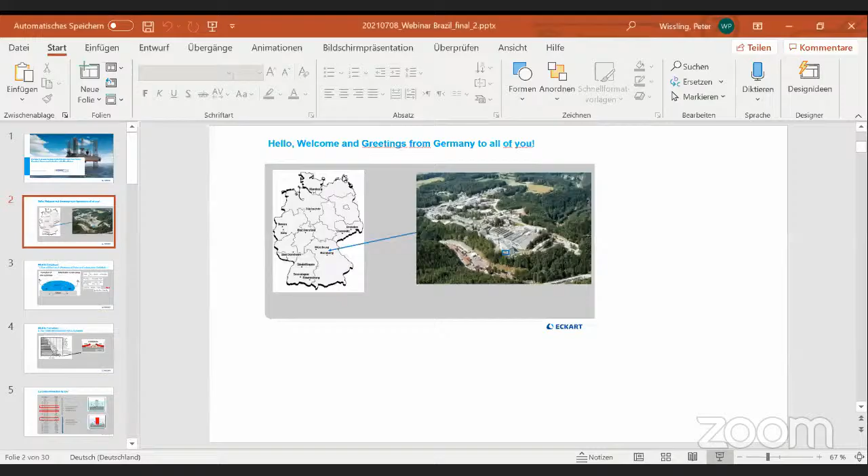So please indicate to me, is the screen visible now? It's visible, Peter, go ahead. Thank you very much. So once again, I am excited always what is technically possible. I am talking to you from the southern part of Germany, nearby the city Nuremberg, which you might know. You see a picture of our plant, the Eckart plant in Germany, and a blue window marked, and that is the window out of which I talk to you today. I would have preferred to talk to you face to face. That is unfortunately not possible.

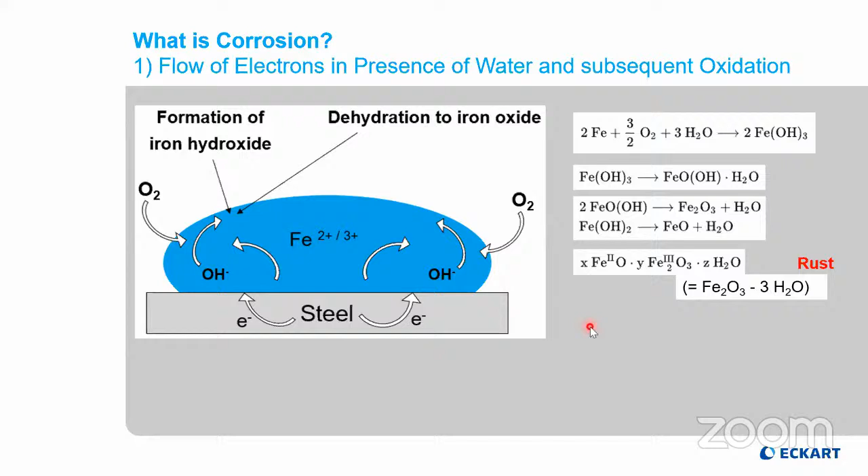The steel in that corrosion process is oxidized, disappears away, the paint is removed, and this rusting process is a big harm to the whole industry. How can this process be avoided?

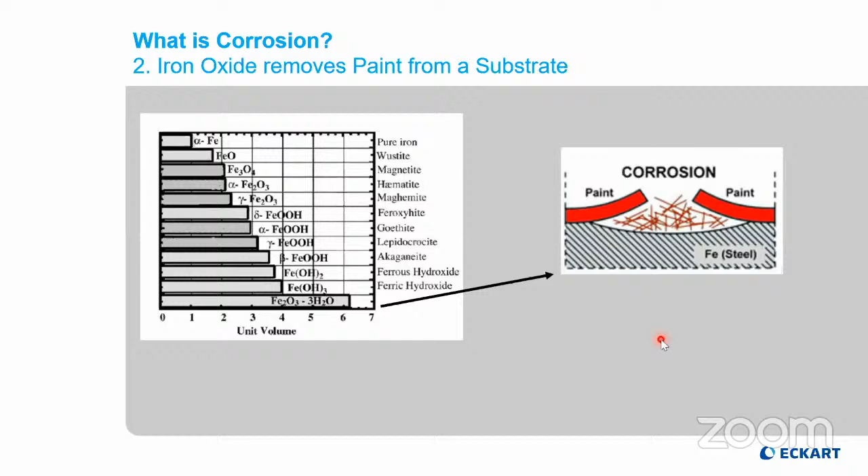Well, by introduction of a metal, zinc, that is electrochemically more negative than iron. This particular metal is then oxidized instead of the iron, and the steel substrate is kept in place. The particular metal, as mentioned, is zinc. Zinc is available in large volumes, it is fairly cheap, and therefore perfectly suitable to be used as a corrosion protective pigment.

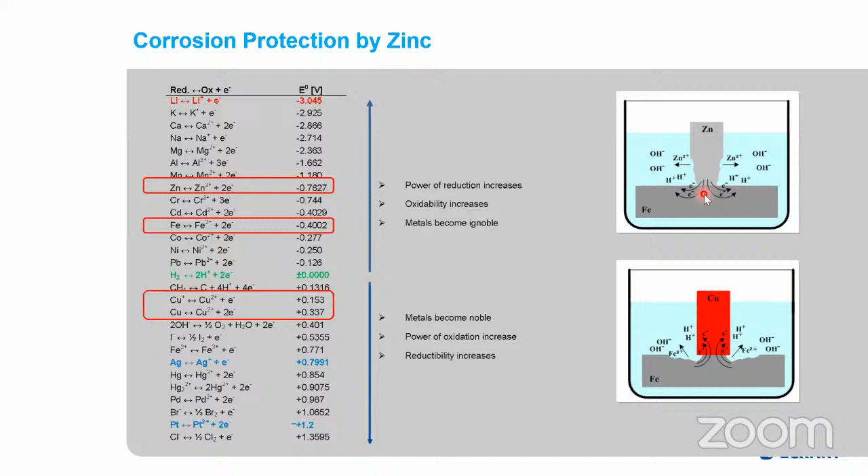If instead of zinc we would use a metal that is more noble in the electrochemical series, for example copper, the adverse effect would occur. The copper would remain in place and the iron would oxidize away. As we don't want this to occur, today we will talk about zinc as a corrosion protective pigment.

Steel needs to be protected when used, for example, for small items like screws, fasteners, or brakes. These are typically used in the automotive industry and are coated in a so-called dip spin process.

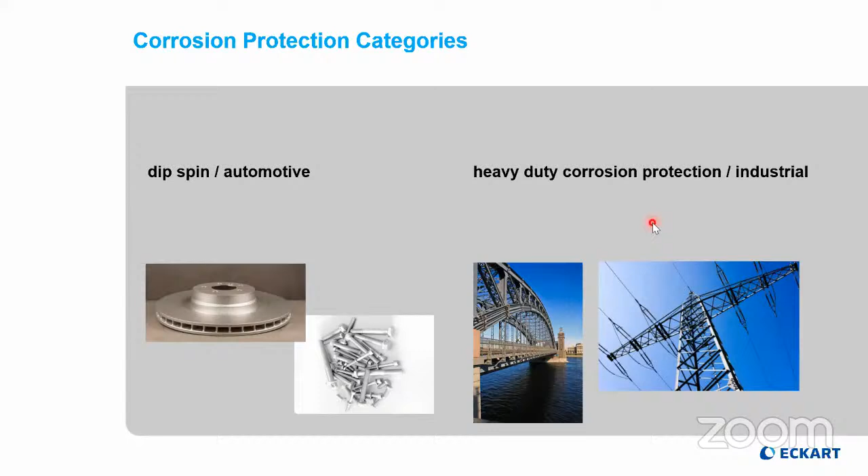Our topic for today is heavy-duty corrosion protection, protecting bridges, power poles, lamp posts, railway items, and so forth with corrosion protective paints. You are all very familiar with heavy-duty corrosion protection. This is predominantly solvent-borne epoxy, typically chemistry. It typically uses zinc-rich primers with a minimum of 85% zinc in the formulation.

It is also a price-sensitive market, but nevertheless, we want to penetrate this market with our ZincFLAKE products. Our zinc flake products are called Proflake. Proflake is an abbreviation standing for protective flakes.

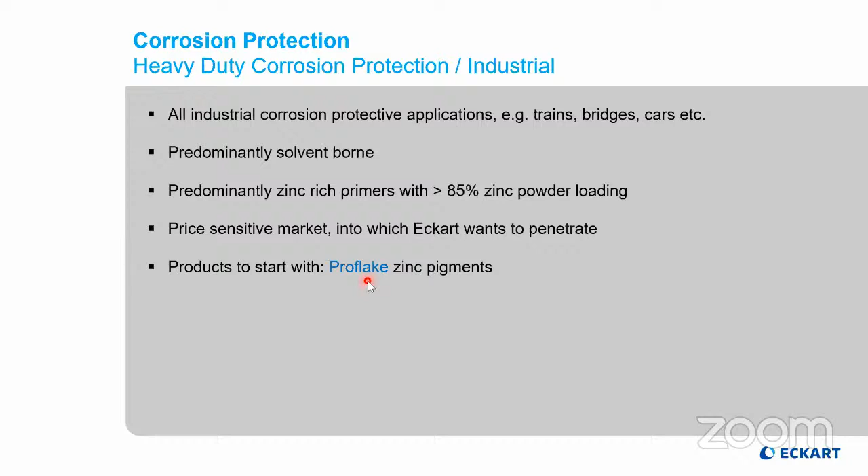So instead of what you are used to in standard zinc-rich primers, where zinc dust is used, which is a spherical species with a relatively low surface area, a very small average particle size of around 3 microns, and a small oil absorption value, our offering is ProFlake, a flake-shaped zinc particle with a substantially higher oil absorption value, meaning a substantially higher specific surface and higher binder uptake. This is very important to understand because, as I will explain, it later influences the formulation of zinc flakes in corrosion protective systems.

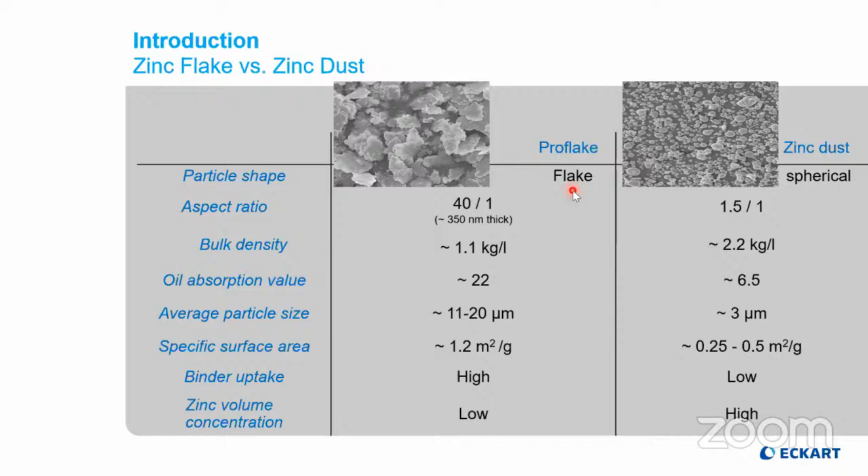We produce our zinc flakes in a two-step production process. Step one is a melting process where zinc at around 420 degrees is molten, and the liquid zinc is pressured through a nozzle into the air. This process is called atomization, and the result is granular, more or less spherical particles.

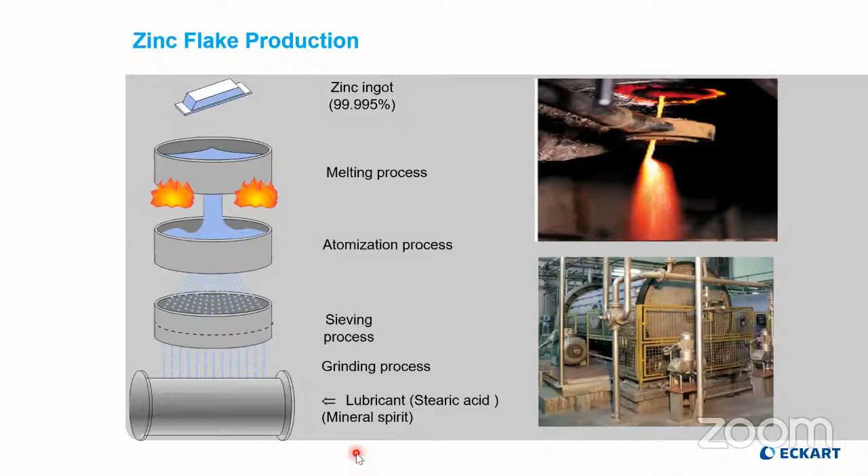In the second step, we mill them, grinding them in a ball mill into the described flat zinc flake particles. This is done using a lubricant, stearic acid, in order to avoid cold welding during the milling process. The milling is predominantly done in a dry milling process, but it can also be done in mineral spirit. Both options are possible and are performed in our factory.

The current ProFlake zinc flake portfolio is relatively limited, but sufficient to fulfill all requirements. We have two zinc flake products in powder form of two different average particle sizes: a finer one, 14 microns, ProFlake 1400, and a coarser one, 20 microns, which is the standard pigment where we initially start to work with.

If, however, you feel inconvenient working with powder, maybe because of safety concerns or dust creation, you can easily use a zinc flake in paste form instead, whereby we offer a 90% pigment, 10% mineral spirit flake paste form of this ProFlake.

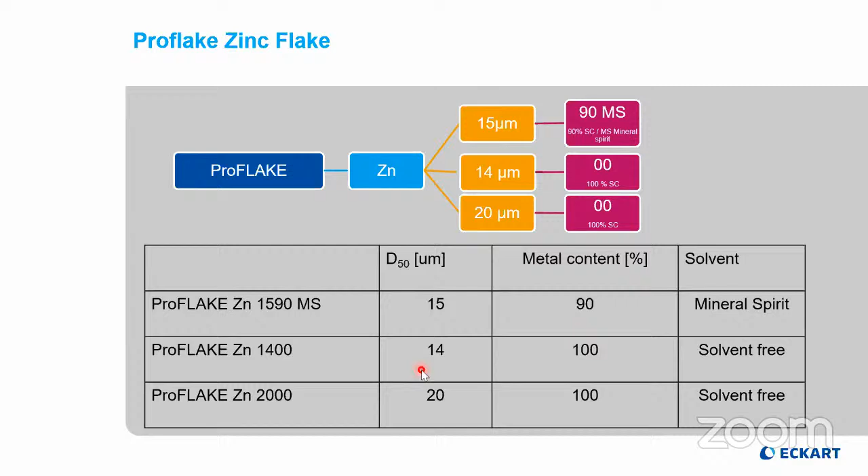Corrosion as such occurs through three different mechanisms. The first is an inhibitive effect, typically provided by species like phosphates and chromates, with a large variety of different products available in that industry. This inhibitive effect is not used when using zinc, both zinc dust and zinc flakes. For zinc flake and zinc dust pigments, there is instead a galvanic effect provided, as well as a barrier effect. These two effects contribute to the corrosion protective performance of zinc flakes.

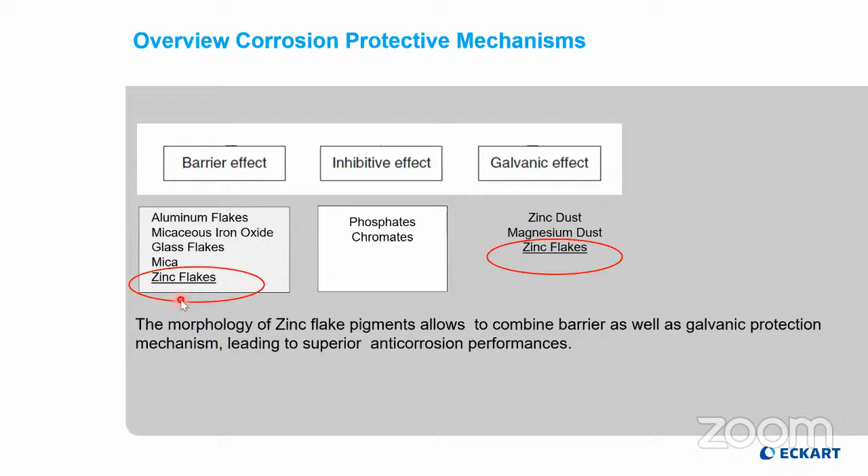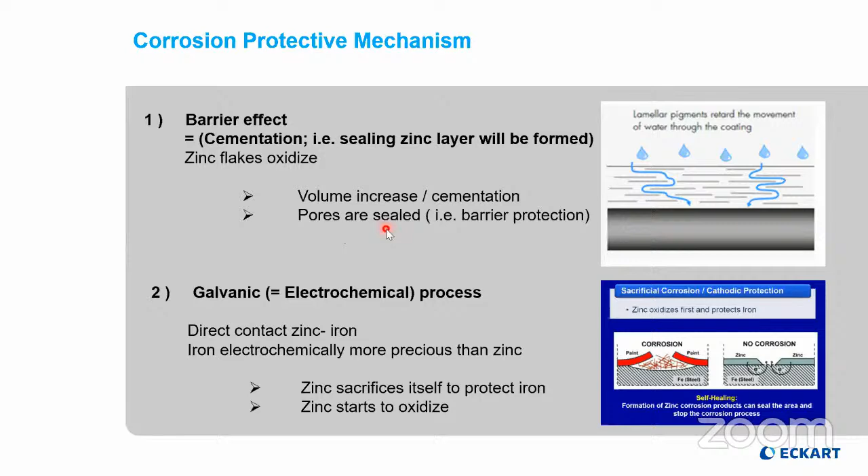Also, a galvanic effect is important when using zinc flakes. With direct zinc-to-iron contact, through the flow of electrons, the zinc works as a sacrificial electrode, and instead of steel, the zinc pigments oxidize, forming zinc oxide. In addition, the zinc oxide generates additional barrier protection. So you have a galvanic process and a double barrier layer: the initial flake layer, and the barrier formation through zinc oxide formation. Any pores and holes in the paint film are sealed by that zinc oxide.

Corrosion protection only occurs when a flow of electrons is possible. Zinc can work as a galvanic corrosion protective pigment when this flow of electrons can occur. This flow can only happen when the particles get in touch with each other, and through that contact point, electrons or current can flow.

That point where individual zinc particles get in touch with each other is called the percolation threshold. Because zinc dust has a very low surface area, the loading of zinc dust into a formulation must be very high, meaning 85%, in order to generate the percolation threshold. With zinc flake, which has a comparatively higher surface area, it is not necessary to load the formulation with that high amount of particles.

We recommend a PVC of 10 to 12% roundabout. Here you see more than 10%, meaning 35% by weight loaded into the formulation, and this is absolutely sufficient to generate a percolation threshold in order to guarantee good corrosion protection with zinc flake. So in comparison to zinc dust, it's really important to understand - and it requires a change in mindset - that you need a lower loading of zinc into your formulation.

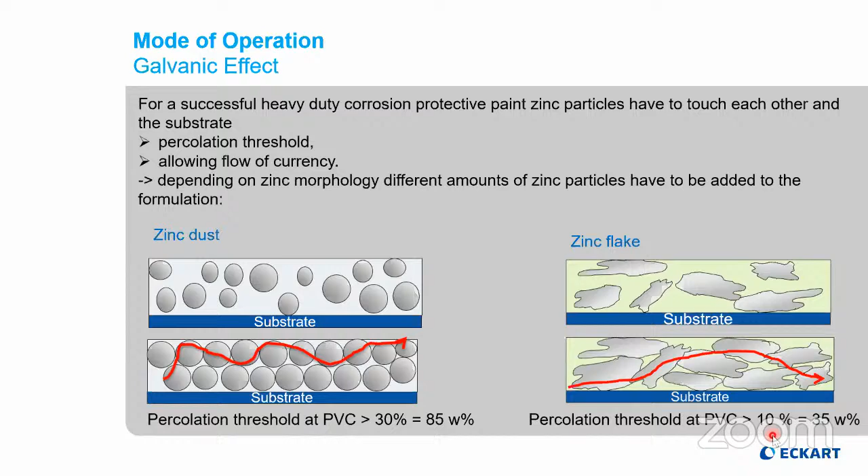Here, as a summary, the mechanisms of corrosion protection. With zinc dust, you have an active corrosion protection through the galvanic properties, and a certain passive corrosion protection because of the cementation process. It's similar with zinc flake, but in addition, because of the zinc flake layer formed, you have an additional passive corrosion protection. We have called this the two-in-one concept, because by using zinc flake, you get an additional corrosion protective performance initially through the barrier layer formation.

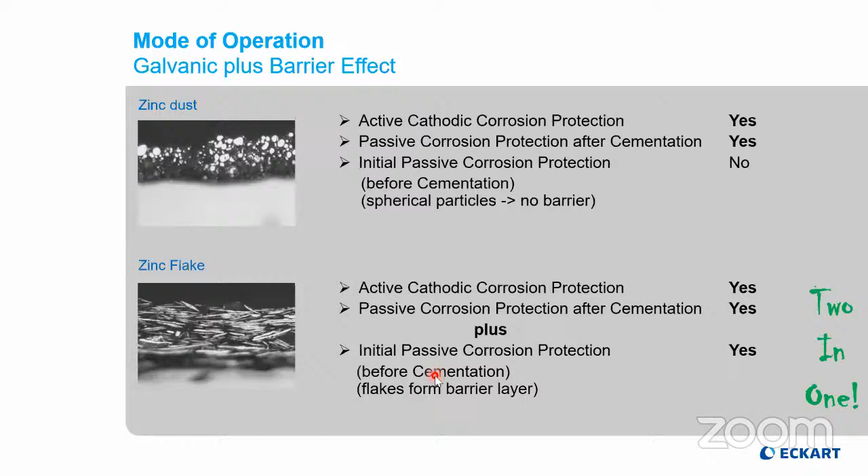In the corrosion protection industry, there is a high degree of regulation through norms. I am convinced you are all familiar with the German DIN 12944 norm, or the subsequent ISO and other norm regulations. These norms so far specified for certain buildings and applications a minimum zinc content of 85%, meaning it would not have been possible to use zinc flake with lower loading in the formulation for building industry applications according to the norm.

This norm has now been changed into a performance-based norm as well, meaning zinc is still specified in the norm, but not by 85% loading - it needs to be loaded into the formulation and provide good corrosion protective performance similar to that of zinc dust. The same applies for the American SSPC norm, Paint 20. So far this specified a minimum zinc dust content of 85%. Now Paint 29 has been issued, which also allows working with a lower zinc content as long as performance is the same as with zinc dust.

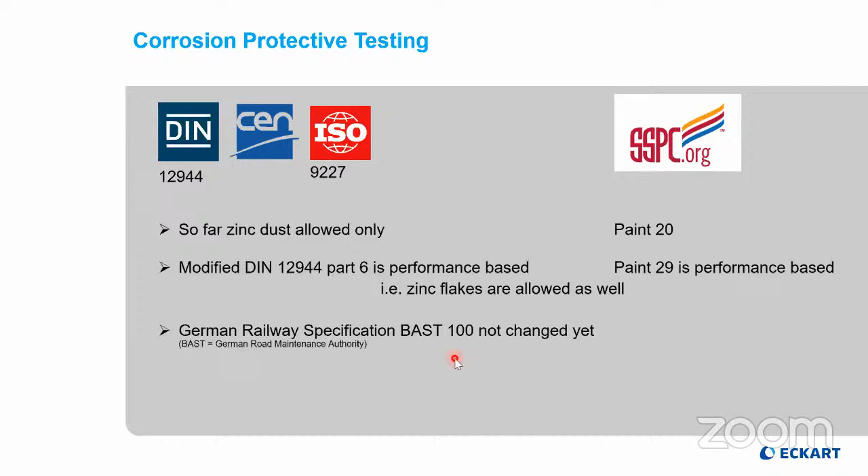There are, in the German 12944 norm, different corrosion categories, different classes, in total 5. Heavy-duty corrosion protection starts from C3 class onwards. The difference between the heavy-duty corrosion classes is the requirement and the atmosphere that the corrosion protective coating is exposed to, and subsequently the film thickness that needs to be applied. The heaviest class is C5, and in addition, a norm that in the past had been a separate norm for offshore applications has been included into this DIN 12944 norm as CX class, representing the offshore requirements.

With our zinc flakes, we have proven we fulfill the C5 norm at least, and this can be achieved by a film build like this. You see here a cross-cut section through a typical corrosion protective system: the steel substrate, the epoxy primer with roundabout 12.5% PVC zinc flake at a dry film thickness of 80 microns. On top of that, with no change to previous procedures, an intermediate coat containing micaceous iron oxide at a film thickness of 160 microns, and on top of that, finally, an 80 micron two-component polyurethane top coat. With this system we worked in order to successfully fulfill the C5 norm for heavy-duty corrosion protection.

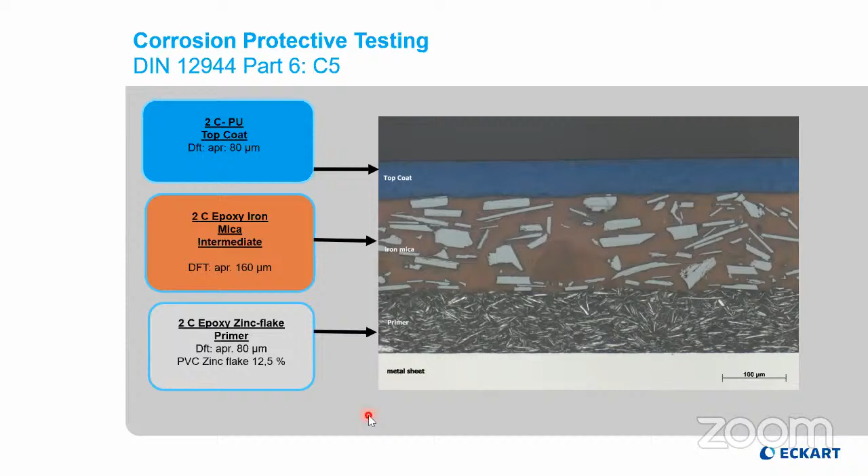In this picture, I want to show you this film build, as just described, after 2,700 hours of salt spray cycling test aging. You see the scratch here at the bottom of the paint film, and you see a little bit of red rust occurring, but you don't see any rust creeping underneath the paint film.

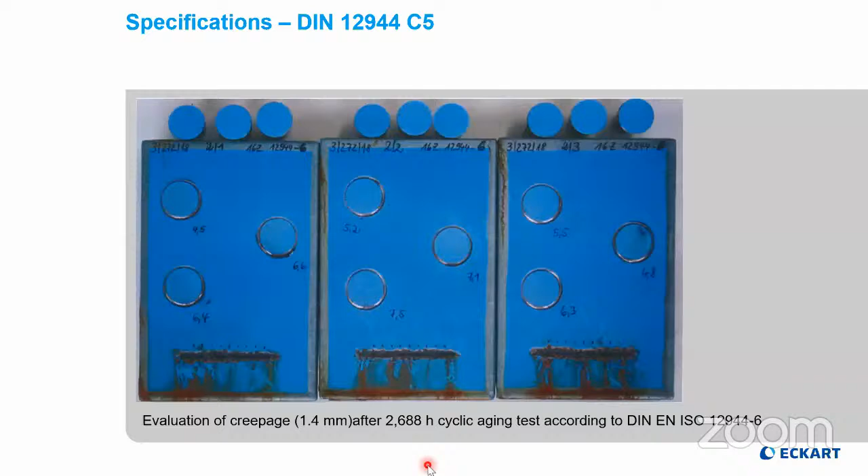We have removed the paint film from this panel as just shown, and this is an enlargement of the cut here. So this is the evidence

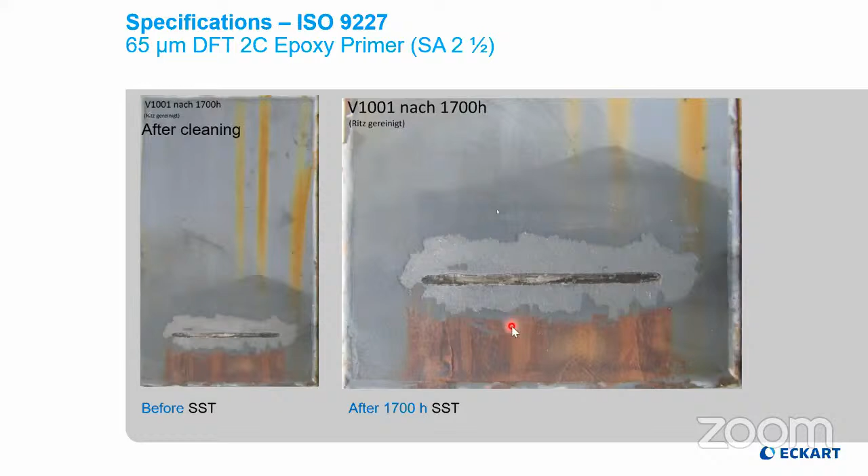to display that this rusting is successfully prevented by using zinc flake pigments. You may argue this is marketing material generated by us to promote our zinc flake products. Therefore, we approached a very well-reputed corrosion protective institute in Dresden, Germany, and asked them to perform the corrosion protection test as per DIN 12944 for C5 class.

Please believe me, it's a German certificate that with this paint, with this formulation, using our zinc flake at 12.5% PVC, the C5 corrosion protective category is fulfilled.

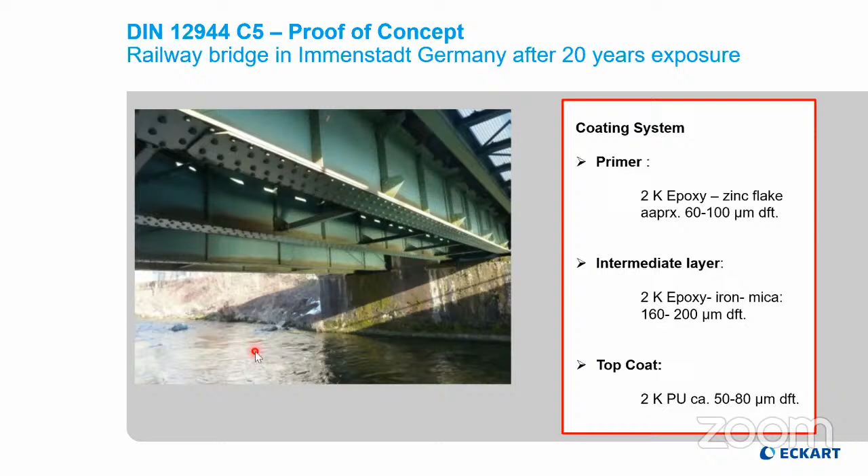In addition, some years back we started to coat a bridge in the southern German vicinity of Immenstadt, near Munich, with this 3-layer paint system as just described. This is a railway bridge across a small river, and after 20 years of exposure, the railway bridge still exists and the corrosion protection is still active and working, as you see in this cross-cut test after 20 years.

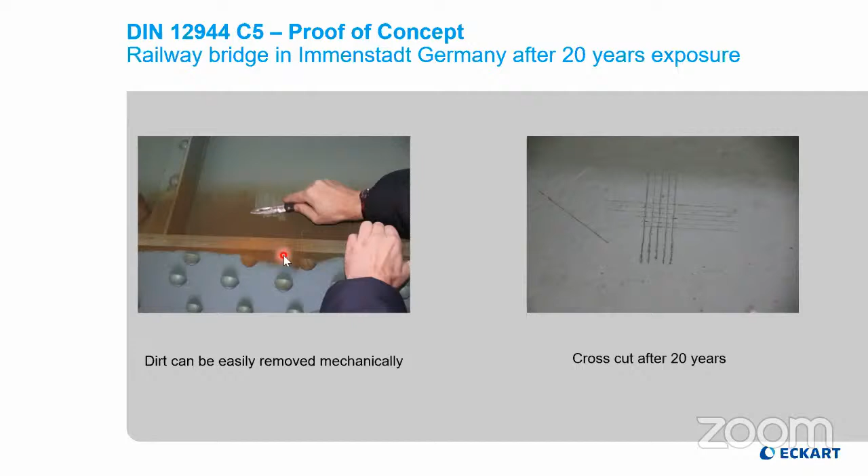You also see some dirt and surface rust occurring on the bridge that can easily be removed from the surface. So we believe that we have fulfilled this C5 class and we can fulfill it.

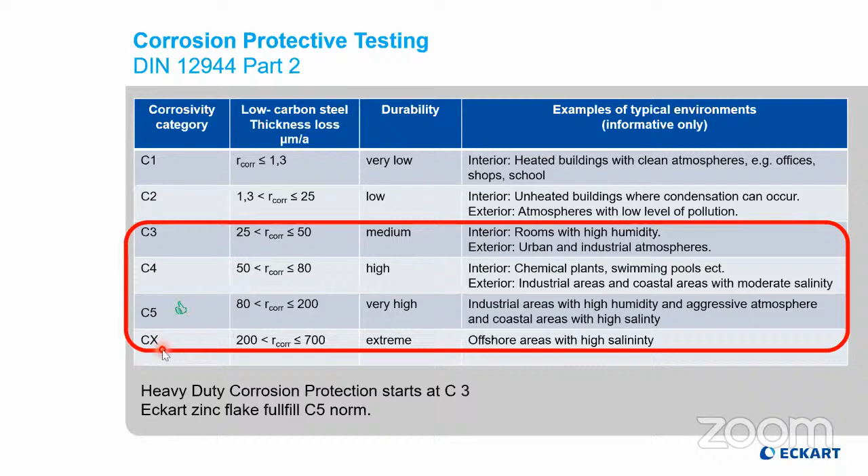We are now, as a next step, working on proving the CX offshore norm, and I hope the results will be available by the end of the year. As you know, the difference for CX, the offshore norm, is exposure to UV radiation and subsequent water condensation, followed by a 3-day salt spray test and a 1-day exposure to low temperatures at -20 degrees, representing a typical offshore climate.

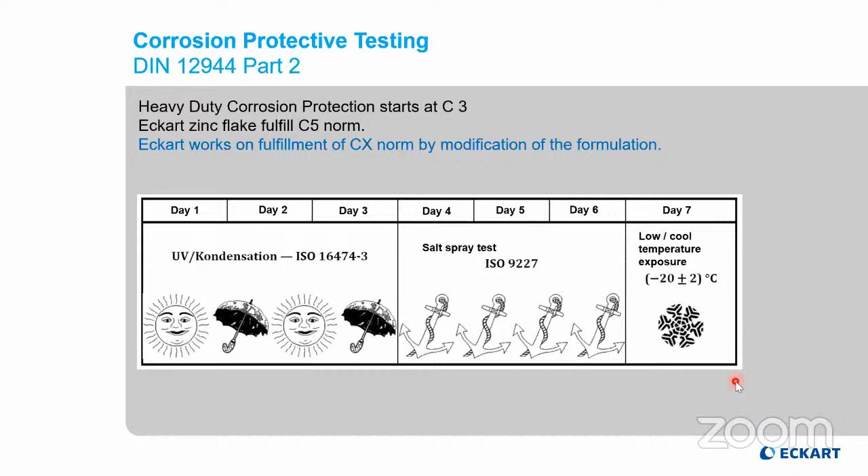When you intend to use zinc flakes, it is very important to use them in an appropriate way to get the full benefits as just described. You need to change your concept from using zinc dust in a dosage in the formulation. Our recommendation is a total

PVC concentration of zinc flake, pigments and fillers of around 35 to 45%. Out of this, PVC concentration for zinc flake should be 12 to 20%. In the formulations as just described, we worked with 12.5% PVC zinc. The remaining PVC concentration is fillers and pigments.

For your calculation, if you want to do this PVC calculation, the zinc flakes have a solid density of 7.1 grams per cubic centimeter.

The incorporation of the zinc flakes into any binder chemistry is relatively simple. You can start with the binder and add the zinc flakes at the required ratio. You need some stirring, preferably using a dissolver disc at a speed of 4 to 6 meters per second, which equals around 2000 RPM. When you do this for 20 to 30 minutes, the zinc flakes should be incorporated accordingly.

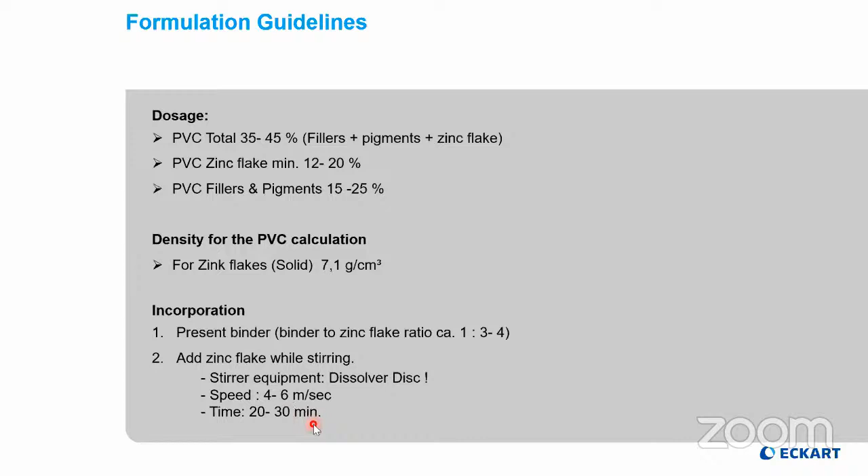We target this concept for all railway applications like trains, bridges, bridge repair systems—although the norm is not specified, we are working with companies like this. Offshore constructions like oil platforms and pipelines, pipeline buildings, trucks, but also shop primers, including very good weldability with these zinc flake formulations during the welding process,

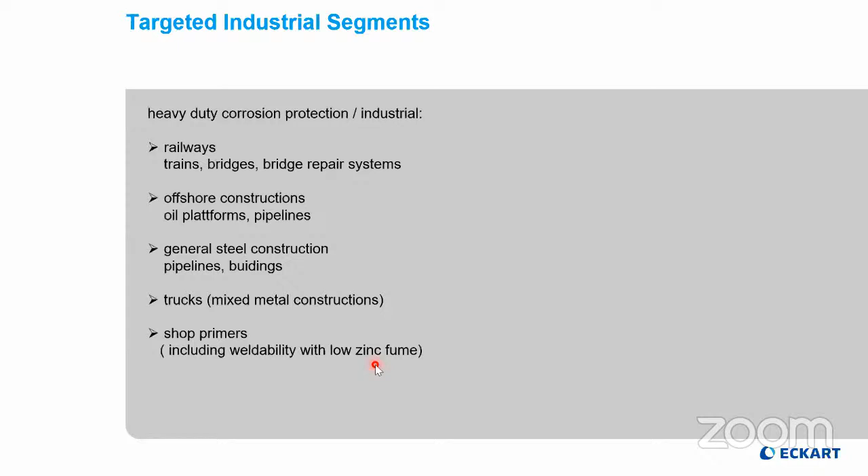with the advantage that there is a very, very small amount of zinc fume generated. You may now ask, why should you change from the well-established zinc dust to zinc flake? Well, I would argue there are some ecological arguments to convert to zinc flakes.

The first one is, with lower incorporation of zinc into your formulation, you reduce the heavy metal content. This applies as well when the construction and buildings are cleaned and sandblasted—there is less zinc or heavy metal contamination in the soil. In shop primers, when these constructions are welded together, you have lower formation of zinc fumes.

You can use zinc flake to formulate primers with a very low VOC system. We have also started to introduce aqueous systems with zinc flake formulations. By use of zinc flake at a lower dosage in the formulation, you

reduce the weight of your coating. Imagine an oil platform with tons and tons of coating on the platform—that can sum up to several single-digit tons savings of paint. And this increases the stability of the oil platform construction.

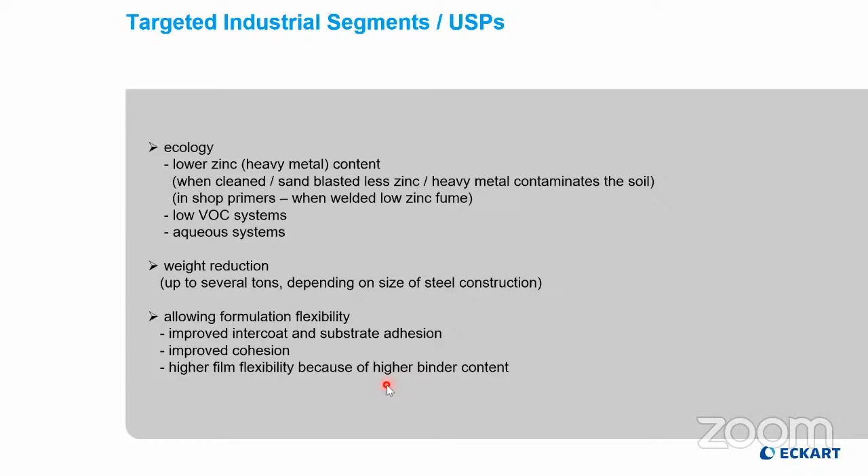I indicated that we start with an offering of 3 different products, 2 powder products and 1 paste product. We will introduce shortly a ProFlake 3000 zinc flake powder, designed to meet especially the commercial requirements of this corrosion protective market, meaning it will be a product we can offer at a good price.

With a good corrosion protective performance. Talking about commercial aspects, we still have to face the pricing of zinc dust. Zinc dust price is around 3.5 euros per kilogram, depending on the current situation of LME. Zinc flake is round about 3 times higher in price compared to zinc dust. However, please consider that you only need 1/3 of the zinc flake in comparison to zinc dust. So the higher purchase price of zinc flake is already compensated by a lower loading.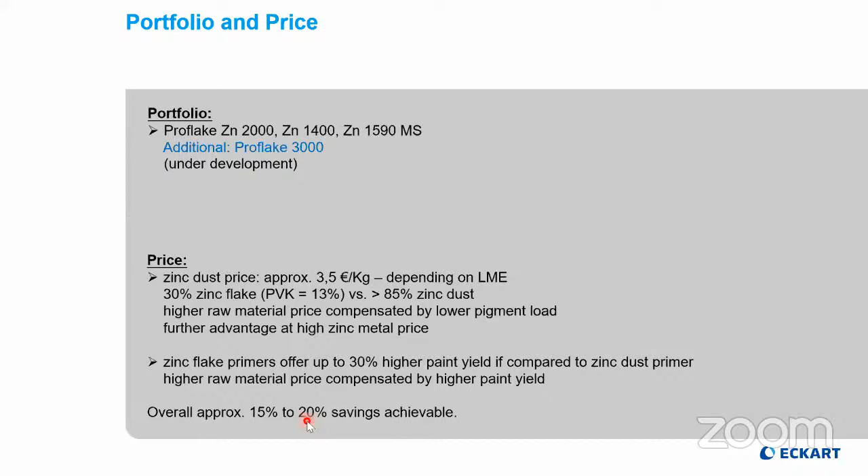With the currently rocket high prices of raw materials, including metals, the lower metal zinc you can use in your formulation, the better price advantage you gain. In addition, we believe around 30% higher paint yield can be achieved with a zinc flake based formulation compared to a zinc dust primer. So in the end, I am convinced it is possible to achieve around 15 to 20% savings by using zinc flake, even though the initial buying price of zinc flake is higher compared to zinc dust.

Saying that, I am at the end of this presentation. I thank you for your attention. I hope it was of interest and generated enough interest for you to start working with zinc flake, offering you all these advantages. And for now, I would leave the presentation mode and turn back to Alexandre.